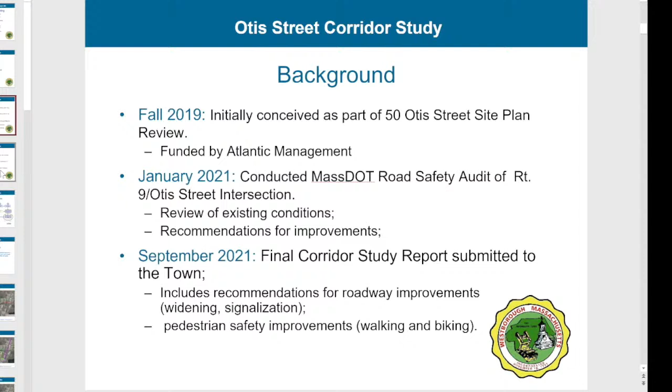So where are we going forward? We're here today for our stakeholder meeting to review the corridor recommendations. We've also submitted an expression of interest for a MassWorks grant, and we're going to be looking for funding for that. In June of '22, we'll have a full application to MassWorks, and the grant awards are generally made in the fall, announcements in October, with awards in November. I think that's a general timeline. I have April Anderson here, our consultant that's going to be working and submitting the MassWorks grant application.

Our next slide shows the process that we went through. The scoping study beginning in 2019 and '20, where we surveyed baseline conditions for traffic and pedestrian and bicycle movement, as well as public transportation. We all know that we have an MBTA station, a commuter rail station on Smith Parkway, just off of Otis Street. We talked about safety for pedestrians in the area, and we did an inventory of our infrastructure for existing conditions.

After we completed the baseline survey, we had our first abutters meeting, our stakeholders meeting on May 10th of '21, from which we included that input and we made some future projections. During the future projections, we did a full build-out analysis of the Otis Street corridor. We included Otis Street, Smith Parkway, Sassacus Drive, and Valenti Drive up on Boston Hill, because in the future it might be possible to have a connection between Smith Parkway and Valenti Drive on Boston Hill.

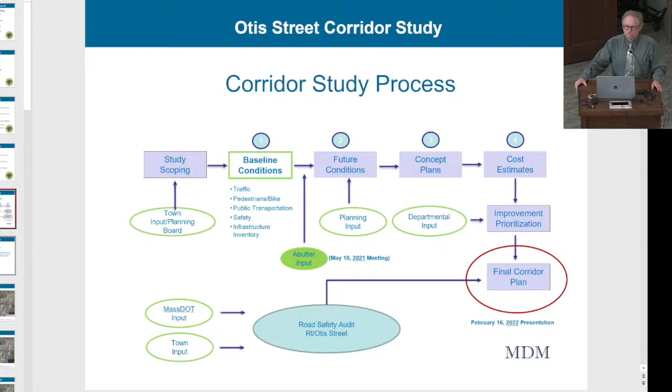I want you to keep in mind what the goal of the plan is here. This is an integrated plan that was considered in the town's master plan update, which was just completed in October of 2021. The overall study goal is to define a set of measures/initiatives, associated costs, and prioritization for improving traffic flow, safety, multimodal travel options along the Otis Street corridor that will guide investment to accommodate future growth.

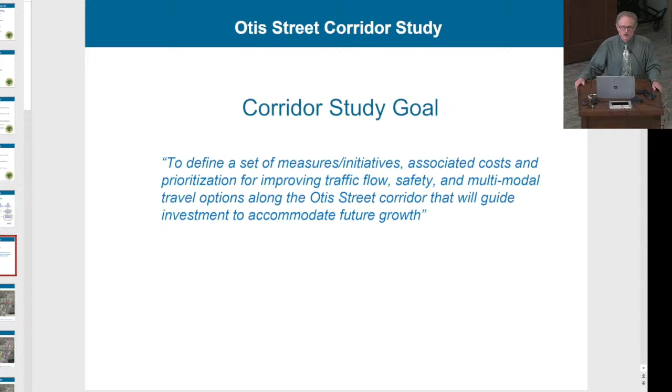That's the most important thing, is we're thinking about what Otis Street will look like 10 and 20 years down the road, to be able to accommodate the demands of the employees that work in these new buildings, think about future investment in the value of the property, and ultimately grow the value of the property on Otis Street and in the west part of town overall. With that said, I'd like to turn the presentation over to Bob Michaud, Principal of MDM Transportation Consultants.

Thank you, Jim. What I'd like to do is really just give a very broad overview of certain elements of the corridor study that have led ultimately to the recommendations that Jim is alluding to. The limits of this, and this was defined during our first stakeholder meeting in May of this past year, really encompasses the intersection at Route 9, the signalized location, all the way down to the south at Fisher Street. And you can see a number of the existing commercial driveways that were considered during that evaluation.

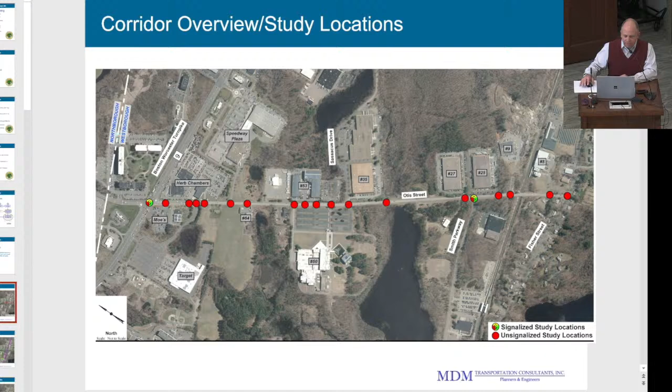Of course, during that process, we're also aware of a number of different local initiatives by private entities to develop certain parcels along the corridor that became integral to the study. This study was not all about traffic. This study was very much a multimodal perspective that considered existing alternative transportation facilities, public transportation in particular. The MBTA commuter rail station, as Jim mentioned, is very close to this corridor.

A fantastic amenity that provides access beyond just vehicles. The Worcester Regional Transit Authority currently has service along the corridor, as well as the Fisher Street corridor, and both are integrated into the study.

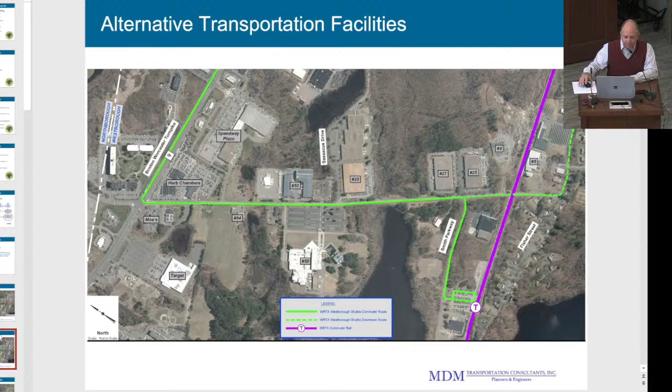Beyond that, we've inventoried and identified a series of infrastructure gaps, particularly sidewalks and pedestrian crossings, areas that need to be linked and enhanced to provide the multimodal functions that are one of the objectives of the study. You can see in this aerial diagram some of those missing links, both on the east side of Otis Street and the west side.

Ultimately, the goal of the study is to connect properties, land uses, and residents to various land use opportunities. For instance, the Arrive apartment complex is really bifurcated from the south side of Route 9 for lack of any pedestrian crossing, so folks inclined to walk or bike to the commuter rail station really can't do so easily until those types of links are addressed.

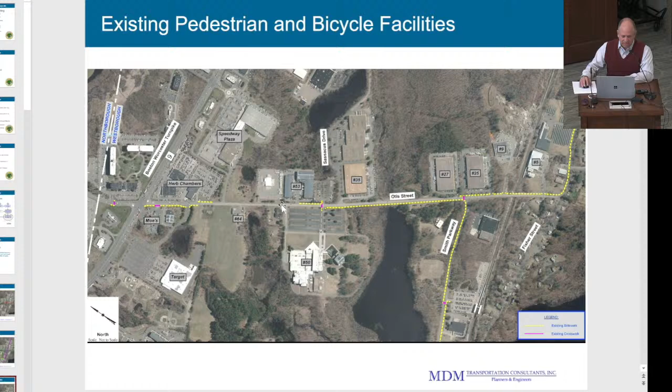We're also well aware of and have included outcomes of the Boston-Worcester Airline Trail feasibility study conducted for the town. As it relates to the Otis Street corridor, you can see outlined in the green shaded area the limits of the corridor study, which include components of the BWALT Trail that would run along the west side of Otis Street. It would provide connectivity to the MBTA station, a crossing of the Route 9 corridor to the Northborough line, and continue easterly to the Main Street and eventually Lyman Street corridors.

So we've incorporated those multimodal aspects within the context of recommendations for the corridor.

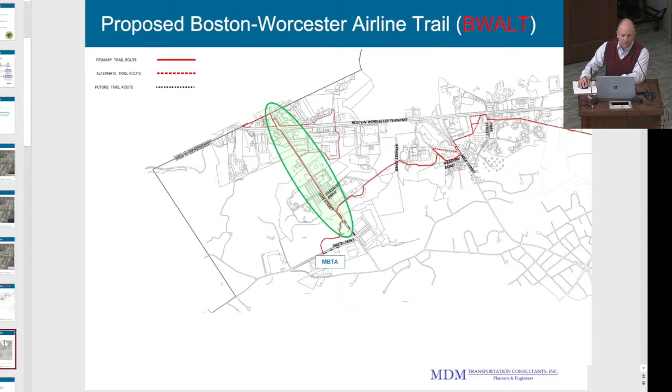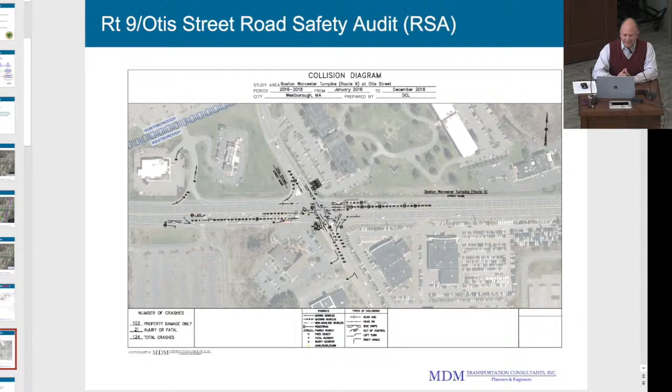As we look at the needs of the corridor, we view those needs from the perspective of a stool—three legs of a stool.

The first leg is safety-related improvements—implementation of certain recommendations of the road safety audit, including signs, markings, and geometric enhancements to that intersection, as well as better management of how the signal operates by split phasing its operation, reducing conflicts within the intersection, and introducing new pedestrian crossings and features to make both pedestrian and bicycle accommodation a real feature of that intersection.

The second leg of that stool relates to the multimodal connections so important in these times: the BWALT Trail on the west side of Otis Street, its potential crossings of the Otis Street corridor, providing sidewalk continuity—particularly on the east side where there are substantial missing gaps—and identifying and developing prominent path and pedestrian crossings at specific locations along the corridor.

The third leg has to do with operational enhancements or capacity. It's no surprise that during certain periods of the day there's a lot of friction, queuing, and delay occurring. The fix to that is additional lane capacity, particularly in the upper or northerly end of Otis Street where it meets Route 9.

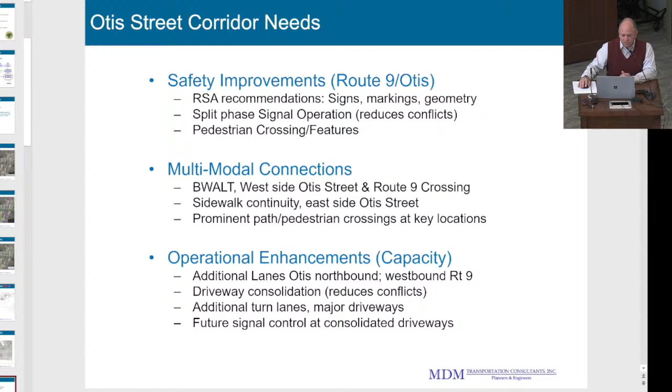The provision of consolidated driveway access along the corridor would reduce the number of conflict points that currently exist, particularly in the northerly section, while also opening up opportunity for future signal control at those consolidated locations. We'll walk through each of those major elements.

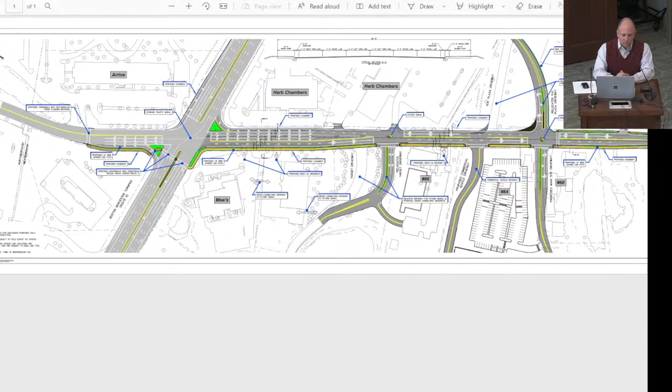What I'd like to do is introduce the outcome of the study, at least from the perspective of certain portions of that three-legged stool—safety, multimodal connections, and capacity. We'll start with the upper or northerly end at Route 9.

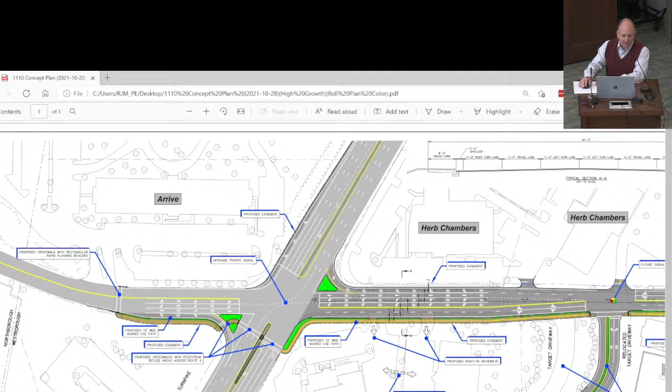You'll see, and this is in a color format here to simplify the discussion, one of the key features is the introduction of a shared use path, a portion of the BWALT Trail. You can see that in a gold tone color on the southerly or lower portion of the page—that's the west side of Otis Street.

It would begin in the vicinity of the Arrive apartment complex, where there's an existing pedestrian crossing. We know that's a well-used crossing, providing the desire line between a very high number of residents and various land uses like McDonald's, Walmart, as well as potentially the RK Plaza on the south side of Route 9.

You'll see that there is some widening anticipated to accommodate the alignment of that path on that edge, as well as an additional right turn lane. The introduction of an enhanced pedestrian crossing of Route 9, eventually connecting to the continuation of that path all the way to Fisher Street.

As we look at other elements of the plan, you'll see a substantial widening for capacity reasons on this upper, northerly portion of the corridor. Today, if you want to go westbound on Route 9, you can do so in a single left turn lane, which introduces a long queue sometimes extending beyond the target driveway. This plan envisions opening up an additional lane, dual left turn lane capability. It also introduces an additional southerly lane headed toward the target, to better accommodate turns onto that southerly direction.

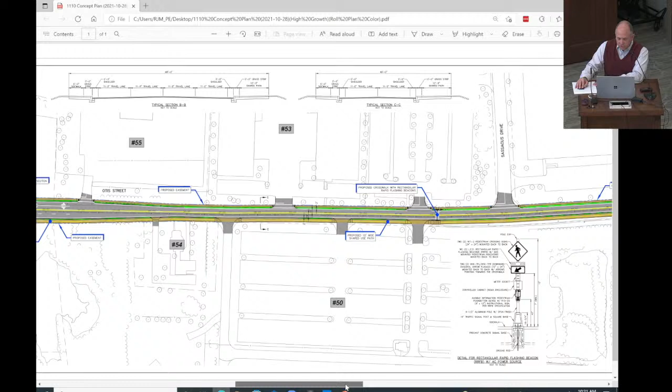Proceeding toward Fisher Street, you'll see that the B-Walt study has introduced the idea of side path connections. This is the approximate alignment on the east side of Otis Street of a future bike path extension by the town as part of the B-Walt study, as well as on the west side, a path connection that would eventually lead to the MBTA station.

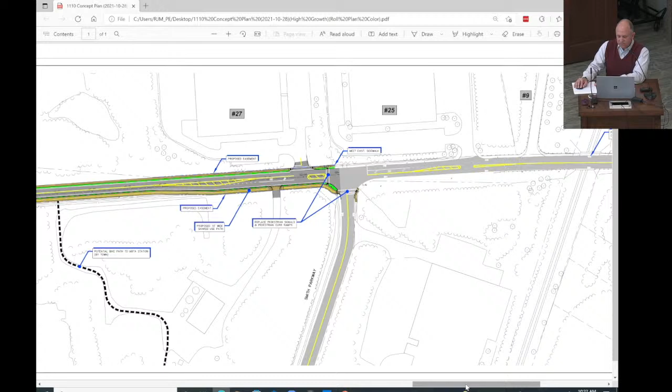So what this plan envisions is an enhanced pedestrian crossing that aligns with that future bike path or B-Walt connection. And finally, as we approach the Smith Valve Parkway signalized intersection, there are enhancements to the pedestrian crossings identified, as well as lane capacity to allow better access to those easterly properties at the signal. This eventually tapers back down to the existing alignment of Fisher Street. The entire corridor will be striped beyond the Smith Valve Parkway for bicycle accommodation features as well.

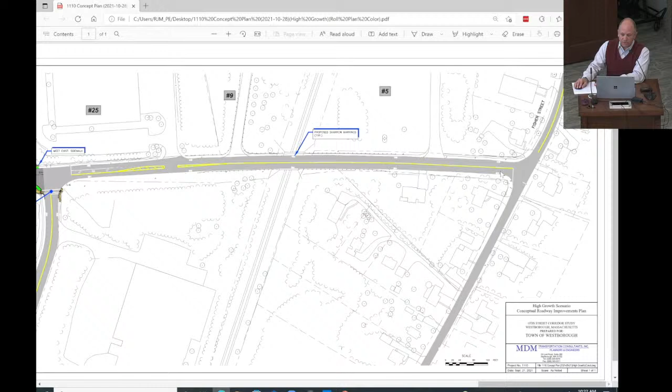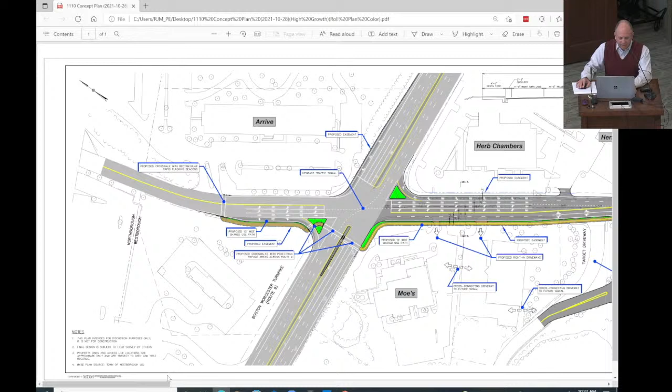All right, so that's a large overview of the plan elements. One of the questions we have anticipated is, how does this relate to specific land uses along the corridor?

We've developed some plans at a conceptual level that identify specific easement areas required to implement this plan, beginning at the Route 9 side at Arrive apartment complex, to introduce a new right turn lane, which will vastly improve operations and capacity on the Route 9 corridor. That lane would require an easement along the northerly edge of the property. It's relatively small, less than 4,000 square feet, and in no way impacts existing parking or circulation at that property, but is required to implement the improvements.

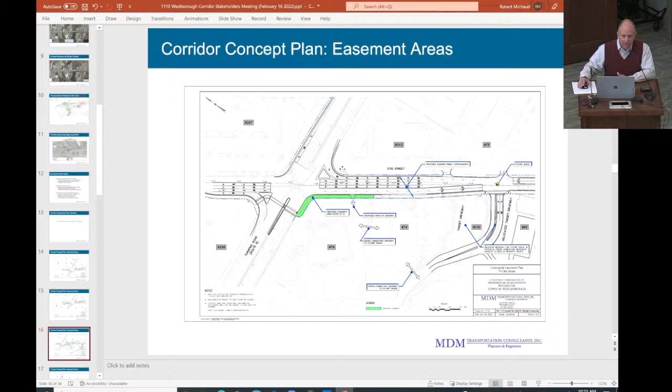As we proceed down the corridor, there's another easement on the McDonald side for constructing the shared use path connection. Further south at the Mose Plaza side, 74 to 76, you'll see, for the same reasons, the shared use path as well as additional lane widening of Otis Street would require additional easements along the property frontages there. None of these impact existing parking or site circulation for those businesses.

As we work our way down, shown in green again, limited easements are required for various properties as we work toward Fisher Street along the west side, particularly for the shared use path alignment. Now beyond the Atlantic properties at 60 - this is the 66 brew pub property, and this is the 60 to 64 property. Easements would be required there as well, extending to the 50 Otis Street property.

And then eventually at Smith Valve Parkway - whoops, I skipped a few, hang on, sorry - Smith Valve Parkway, where the town actually owns that land, would require yet another easement.

As we look at the easterly side, or the Herb Chambers side of the road, again a series of easements would be required, none of which impact parking, none of which impact site circulation or property rights along that edge. This particular taking at the upper end of Otis Street is really for getting that extra left turn lane in, and as we proceed down, principally for construction of sidewalk components.

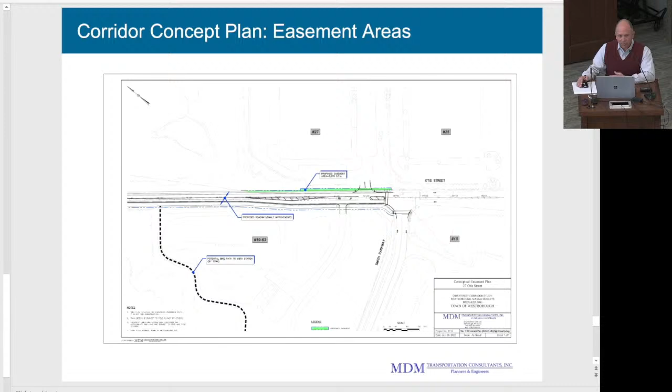With that, that's the technical aspect of the finding. I'd like to introduce Bob Buckley of Riemer Braunstein, who's going to walk you through the implementation process and what that entails, both from the funding perspective and the landowner participation process. Thank you, Bob.

Before I begin, just so we're clear on the various roles: I represent the applicant, Atlantic Management, on a number of the projects here. We agreed to fund and work with the town on the initial corridor study, which Bob presented. Bob was the consultant for the town. We retained certain other consultants, which I'll introduce as we go along, to help the town in this climate perhaps get some infrastructure money to implement some of the improvements we've shown here.

From a legal perspective, I think all the property owners would benefit tremendously from these improvements because they will enhance traffic flow, pedestrian safety, and entry and exit from their properties. That was one of the goals in putting this together, along with making a natural connection to the commuter rail station. Atlantic, as part of their site plan approvals, will be constructing portions of this as they proceed with their development. Based on stakeholder meetings and feedback, we'll advance the plan set to the 25% design plan so we can be considered, hopefully, for state and federal funding to implement these. It's a unique opportunity to do a lot in a short period of time with great improvements.

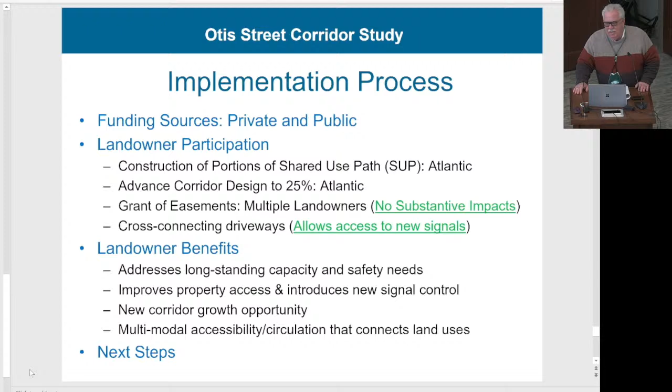One of the things that we did as this progressed, as part of our 64 site plan approval, we agreed to fund the retention of a consultant who is well-known in the Commonwealth and very successful at interfacing between municipalities and the state and other sources of public monies, because this really is a true public-private partnership. It's April Anderson right here, who's been working with us and the town to file the requisite applications.

It's such a unique opportunity because we have a moment in time where there's perhaps a tremendous amount of infrastructure money, both at the federal and state level, and we have a project we're trying to position to be ready to go. A testament to your planning over the last 20, 15 years, you have a true rail transit district, a commuter rail station with housing and commercial development, emphasis on pedestrian access, and the ability to interface with hiking and trails. From a planning standpoint, it touches all the bases, which helps us in the application process and puts this project at the front of the line. That's why we have April, and she'll help us get there.

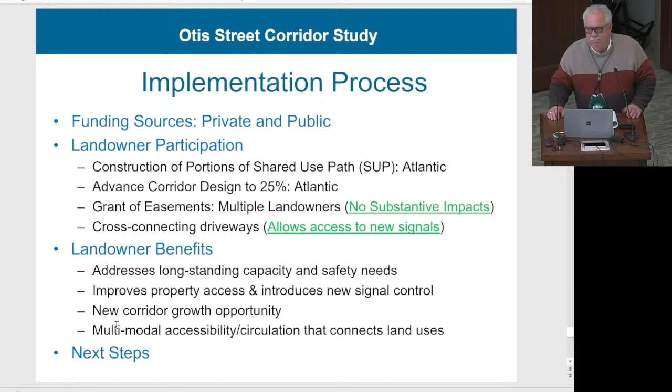So I'll turn it back to you. Yeah, I think perhaps back to Jim.